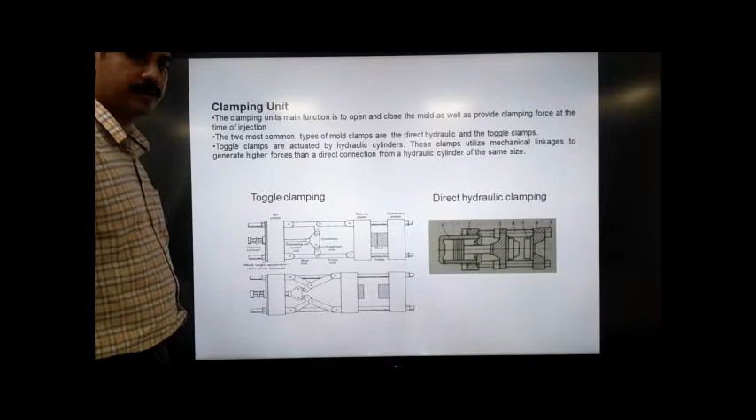So we are having the clamping unit. As we already mentioned, we are having different types of clamping units in different types of machines. In sophisticated modern injection molding machines, we are having different types of clamping units. Most commonly used is two types of clamping: one is toggle clamping, and the other is hydraulic clamping.

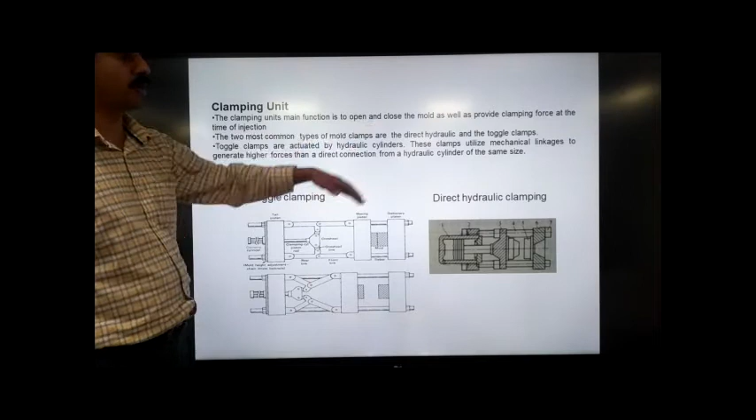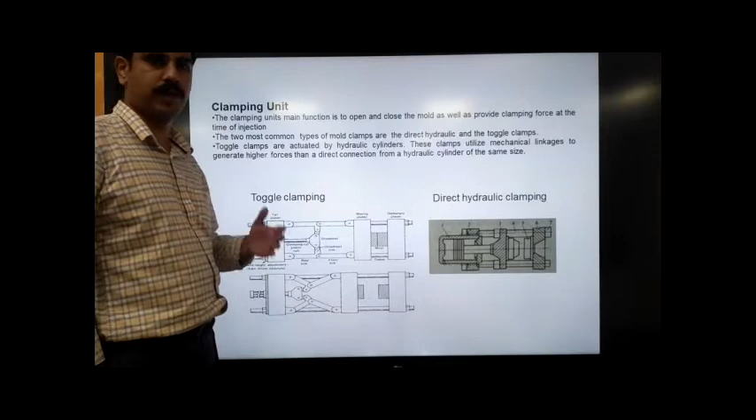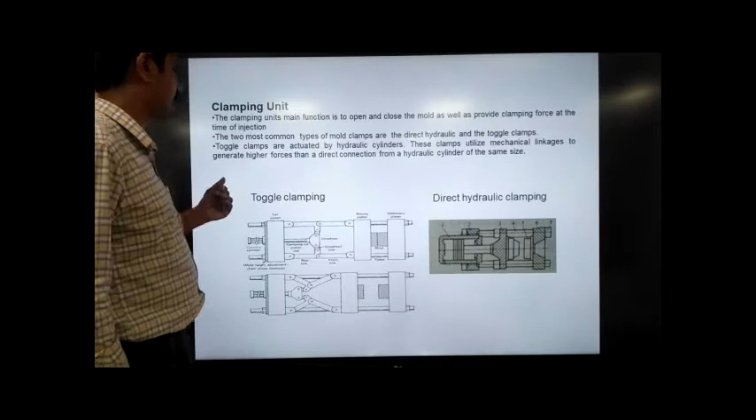So what is the function of this clamping unit? Of course, it is to open and close the mold. It is not simply opening and closing, it needs to provide the clamping force at the time of injection. So that is very important. Opening and closing is required, but more importantly, the necessary clamping force to keep the mold in the closed condition is provided by the clamping unit.

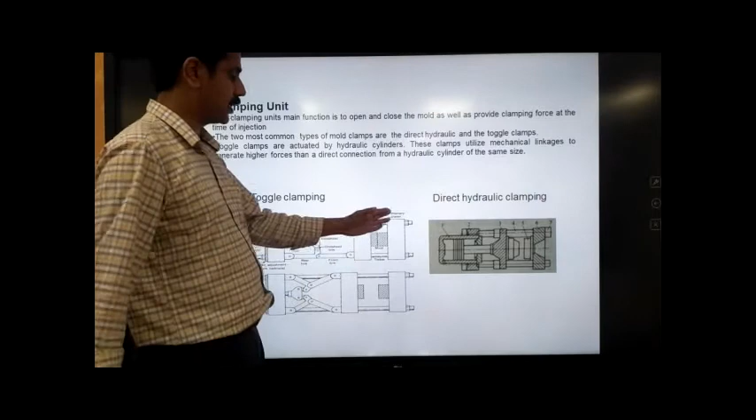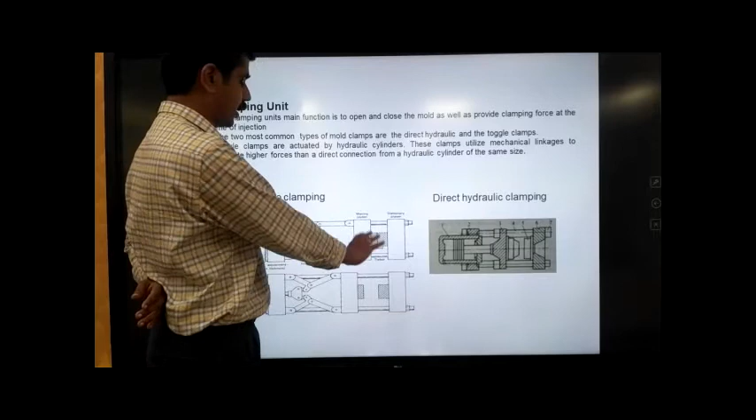And as I mentioned, we are having two types. Toggle clamping system, as we have already mentioned in this picture, you can see in the figure, I will explain. So here we can see the mold. This is very small as far as the other things are concerned, because we are more focusing on this. For understanding, we can say there is a stationary plate and a moving plate, and the mold is kept at the center. We require this plate to be opened and closed. So this is now in the closed condition, the mold is in the closed condition.

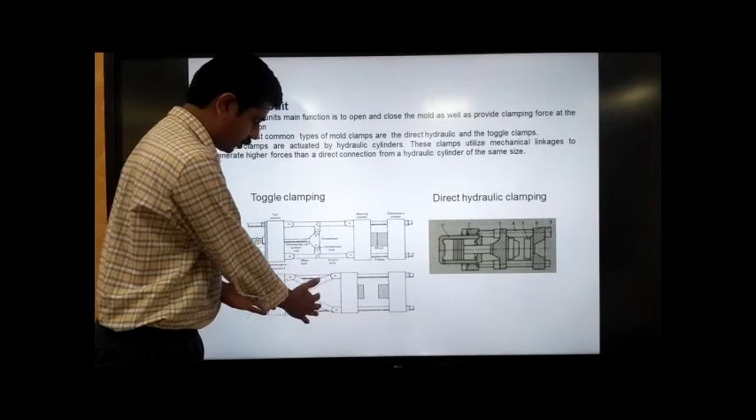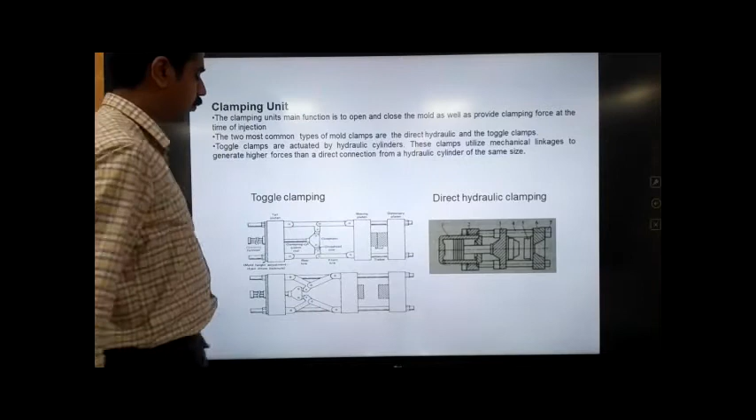So for this closed mold, we will have the connection using several crossed links. These crossed links will help in closing the mold, and we'll have the toggle clamping system in the collapsed condition and the opened condition here. Now the mold is open, so these crossed links are now collapsed. This will be stretched in this fashion. So simply we can say this is going to be a mechanical locking system that is used.

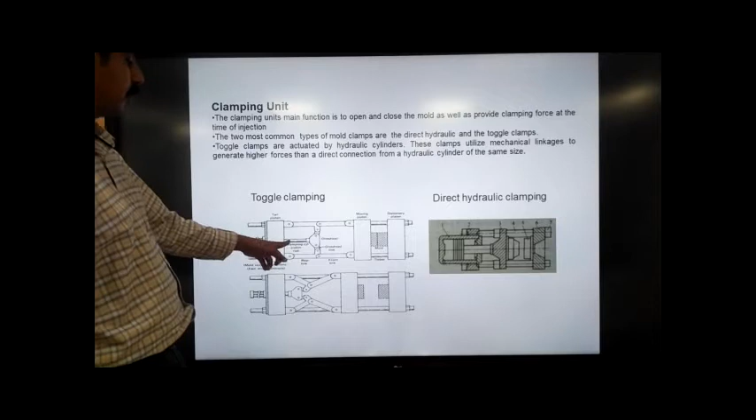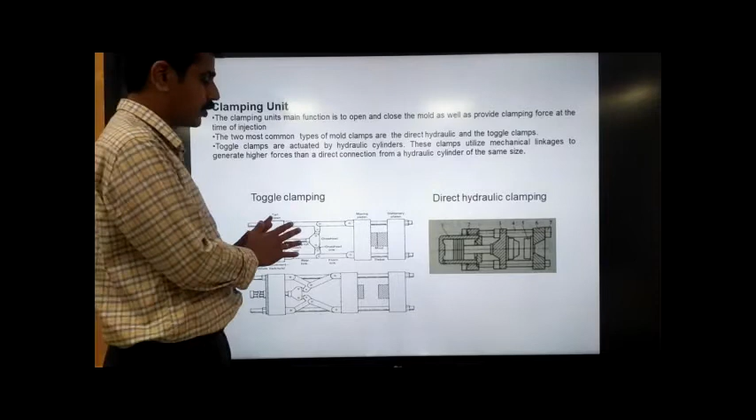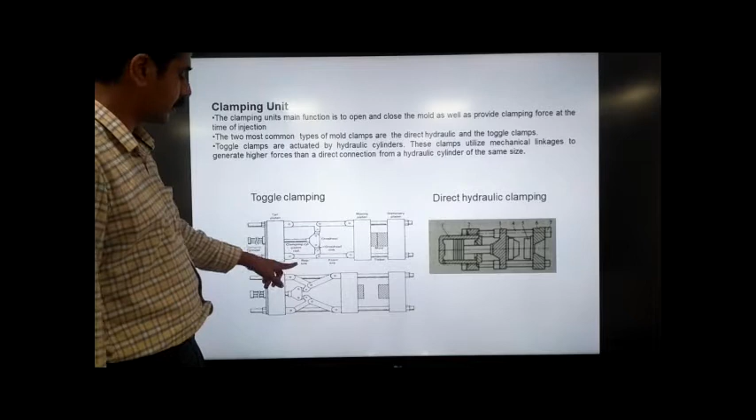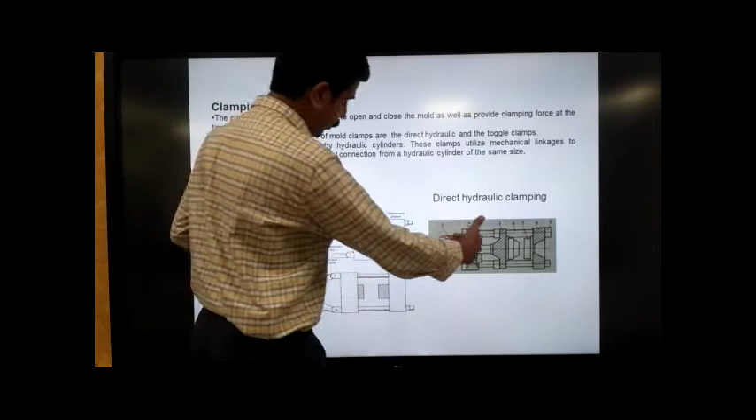This system is actuated by the help of a clamping cylinder piston that is being shown here. We are having a clamping cylinder piston used, and the actuation, that means the links are being stretched by the help of this hydraulic system that is being used. But the majority of the force required for keeping the mold in the closed condition is given by the links, that is mechanical links, or simply we can say we are having front link, rear links, etc. These links will provide the necessary amount of pressure required to keep the mold in the closed condition.

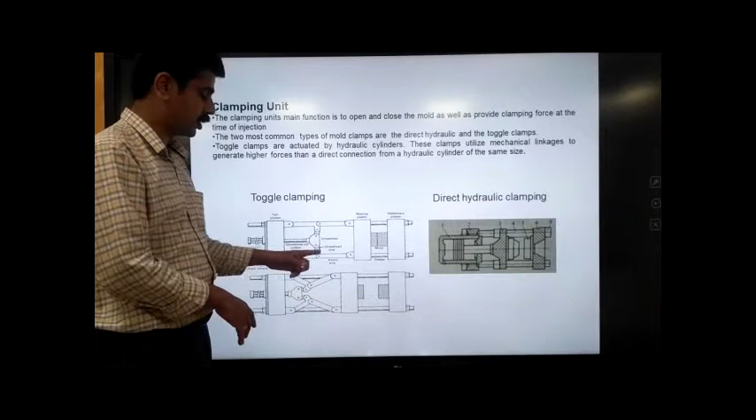Why do we require that pressure? Because from this side we are having very high injection pressure of plastic material that is entering into the mold. So the mold should not get split apart, and we need to keep it in the closed condition, and that force is exerted by using these stretch links.

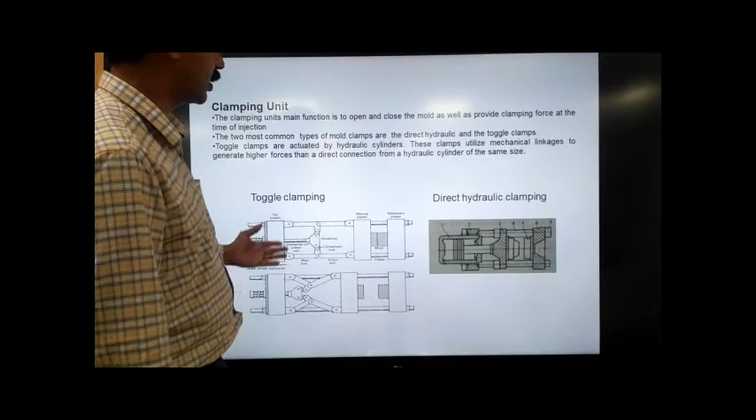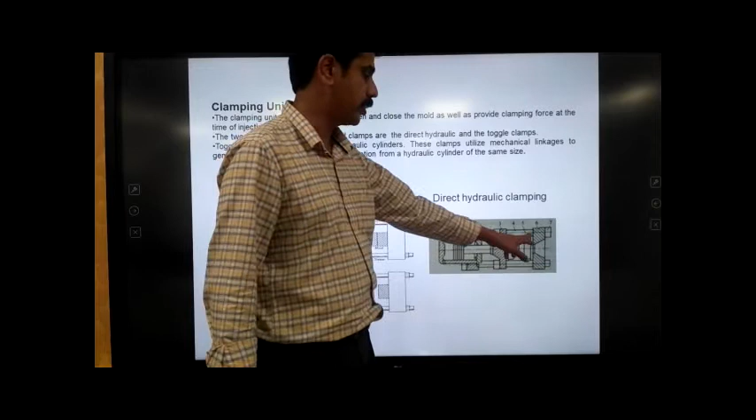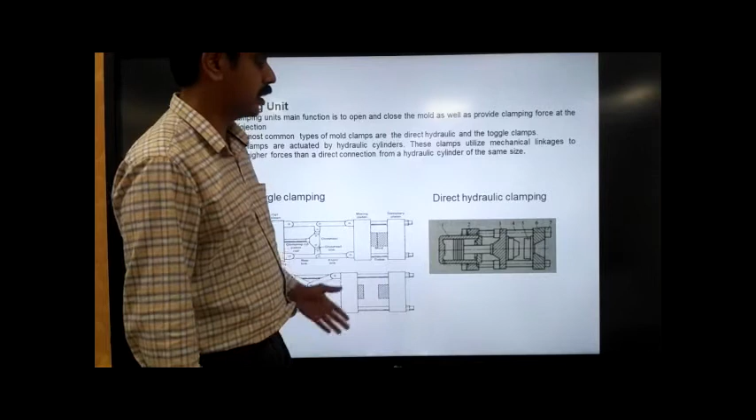And when we come to the hydraulic clamping system, we will not have this mechanical arrangement. The whole pressure is exerted with the help of pressurized oil. The oil is being pumped using a pump and a motor. It will be pumped, and the mold is being placed in between the stationary and moving platen, and the whole pressure required is given by the oil pumped by the hydraulic system. So we are having different arrangements for that.

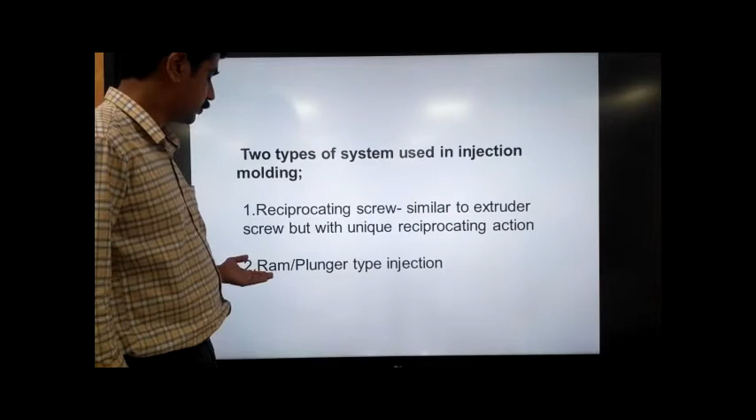We'll have detailed discussion later, and we'll discuss what is going to be the type of system used in injection molding. Normally, in the majority of cases, we will have a reciprocating screw machine. Nowadays in industry we will not be able to see the second type. This was actually used earlier in industry. Nowadays ram or plunger type injection molding machines are not commonly used.

And the functioning of the screw system is explained here. I will have a very short discussion on this. The resin is melted by mechanical shear. What is meant by mechanical shear is the shear force that is exerted by the rotation of the screw. We are all familiar with the shear force. When the screw rotates, there is a very small space in between the screw flight and the barrel.

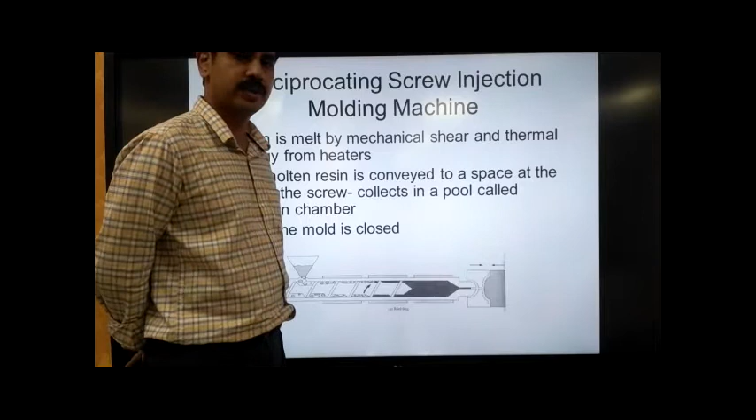So there is a very small clearance. Through this clearance, the plastic needs to move forward. That barrel is being heated thermally, that is why thermal energy is given to the barrel. So along with the thermal energy and the shear force, the plastic will get plasticized. The molten resin is conveyed and collected in this injection chamber. That is how the process will go on.

And then the material that is being accumulated in front of the screw is injected into the mold. Here you can see the mold is closed, and the plastic material is being conveyed. This picture is only intended to give knowledge of how the plastic moves forward.

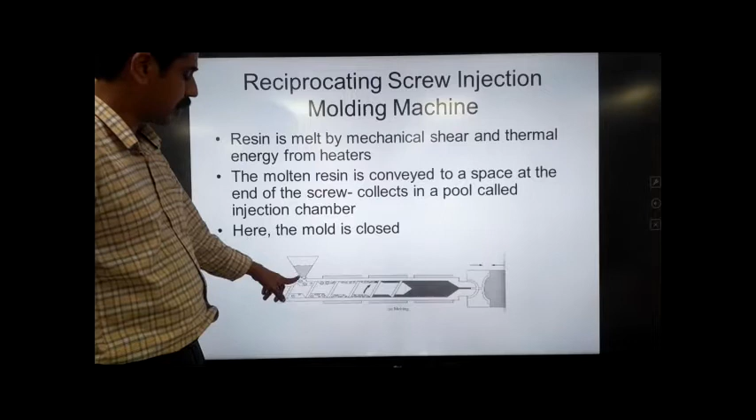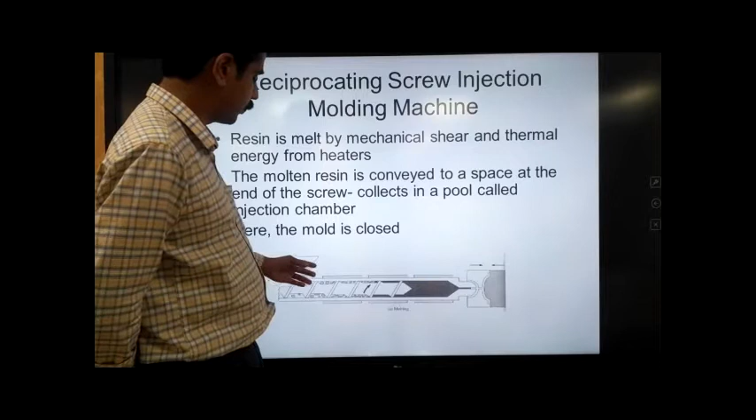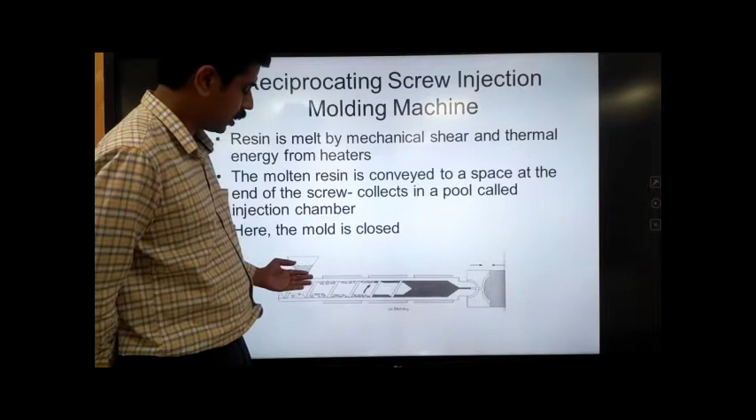You can see that here the plastic granules are of larger size. When it moves through the screw flight, the size is getting reduced. It is finally reduced, and now here it is being plasticized. As the plastic material moves, this barrel is being heated by the band heaters placed externally, and the plastic material in granules moves forward, gets the particle size reduced, then plasticized and gets accumulated in front of the screw. That is how the process will go on. This is simply the melting process, and the plastic is getting accumulated.

So now we'll have a discussion on the reciprocating screw machine and how it functions.

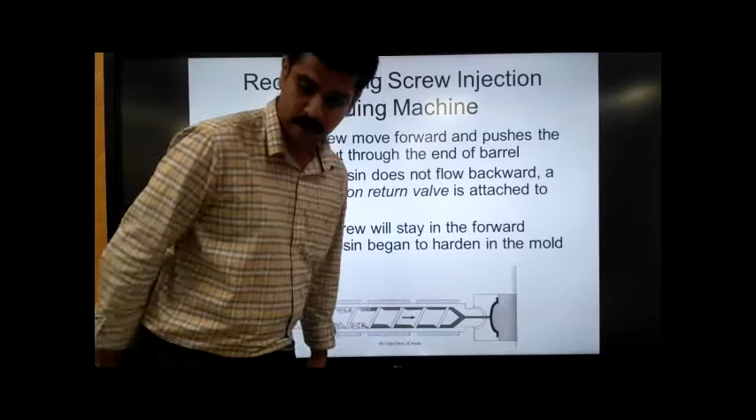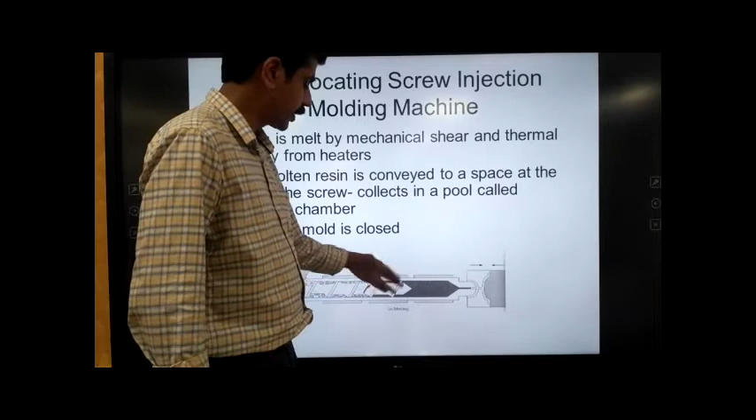Once the plastic material is added, the entire screw moving forward is used for injecting the plastic material. Once the plastic is melted, it injects the material. In the previous picture, you can see the screw is in this position. The screw position is backward, or it moves backward, and when it rotates, it moves backward. That is how the process goes on.

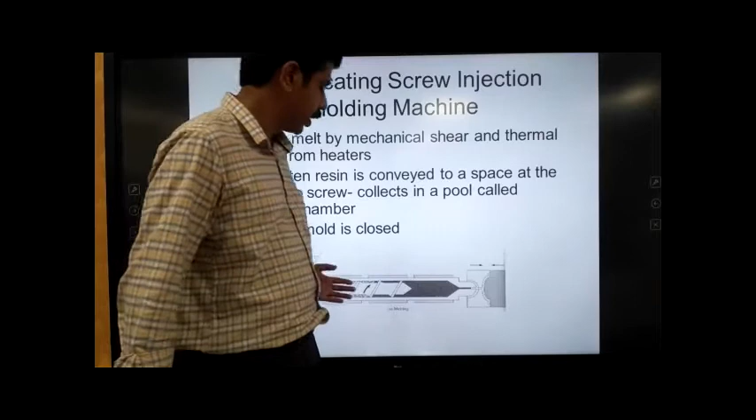Once the plasticized material is accumulated, it will have a reciprocating motion. Further, it will not have any rotation. It will have a very fast reciprocating forward motion. That is how the material is being transferred.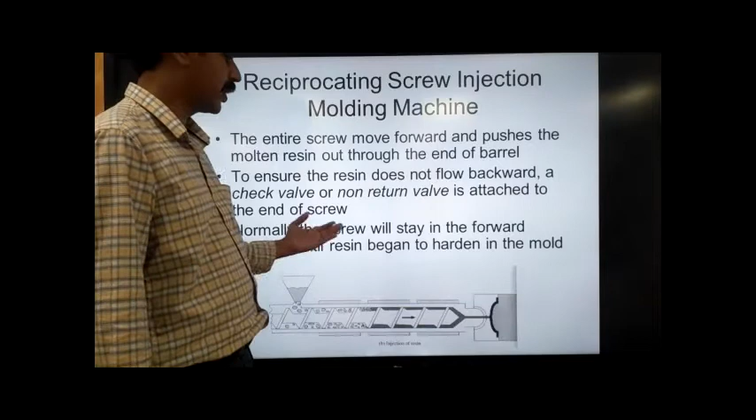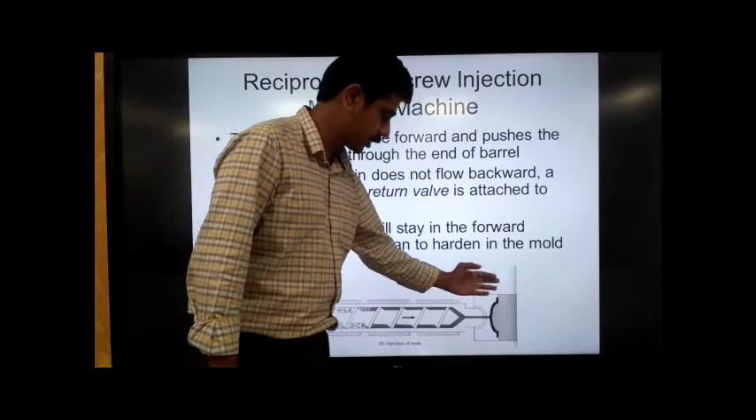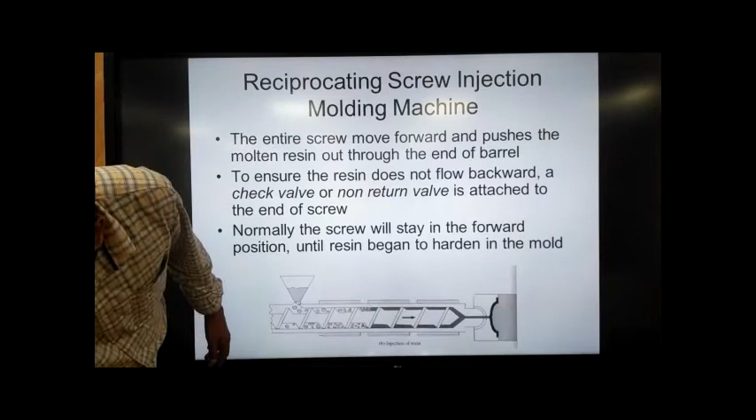Once the material is transferred, the screw will stay in the forward position for some period of time, simply until the resin begins to harden inside the mold. Once it moves forward, the plasticized material is transferred to the mold, and the screw remains there for some time so that the plastic that entered the impression remains there and gets solidified. For that particular time, the screw stays in the forward position, and then it starts to retract.

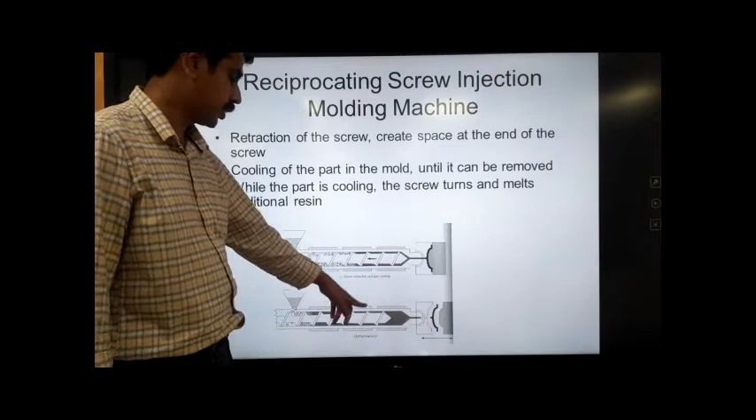When the screw retracts backward, again the plasticization occurs and the material accumulates in front of it. This is going to be a cyclic process. Once the material is added, this process continues for a number of cycles. So when we require, suppose, 10,000 products and we have a single impression mold, once we set the machine, it will continue its operation without any stoppage, but the process is cyclically continued.

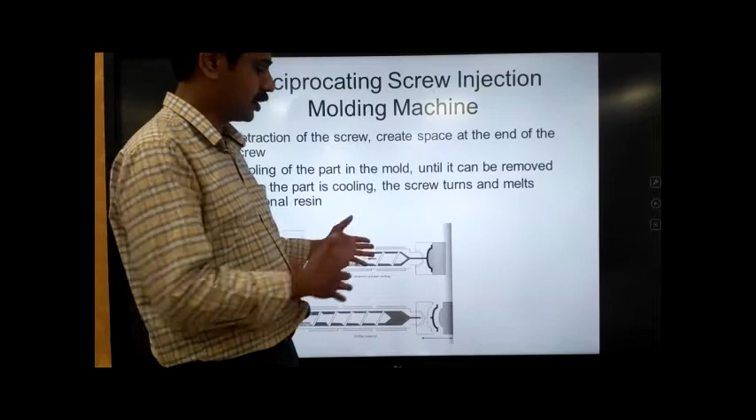So one material is added, the added material gets plasticized, gets accumulated, it is injected, again the screw rotates and moves backward. Like that, the operation has a cyclic effect, or cyclically the process goes on.

The advantage of this process is that screw plasticization gives uniform melting. One important thing regarding thermoplastic material in injection molding is that we require uniform melting of the plastic material. Otherwise, if the plastic is not uniformly melted, we'll have unmelted plastic material going into the impression, and the process will not be continuous.

Again, we'll have very good dispersion of additives, so mixing of the additives is very important. When we come to the injection molding process, normally we have 2-3 additives commonly used. The most commonly used one is color. In some cases, we will also have certain fillers.

Suppose we are going to have color. This color is used in a very small quantity, but the entire plastic material needs to get that particular color. So before that, we require good dispersion. When we use a reciprocating screw injection molding machine, we get very good dispersion.

Compared to other processes, we have lesser injection pressure. That means when using ram injection molding, we have greater resistance for the plastic to flow, and the pressure requirement is very high, and we'll have fewer stresses.

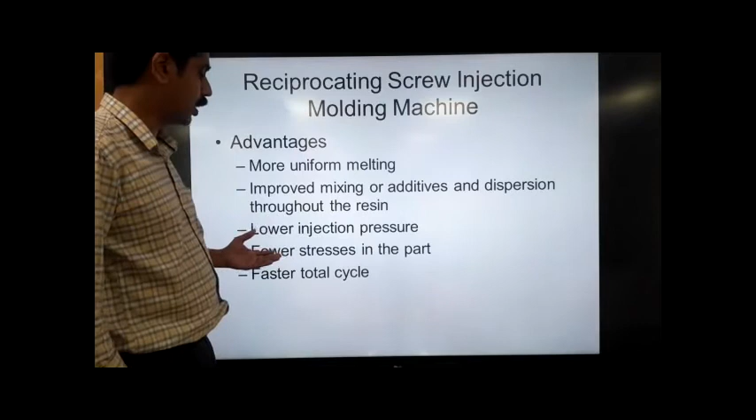It is the stress induced in the part that affects its performance. In an injection molded product, one of the main problems we face is regarding the internal stress that comes into the product. So we require the product to be made with lesser internal stress. Compared to ram injection molding, screw injection molding will have lesser stress induced into the part. And the last one, very important, is that we have a very fast total cycle.

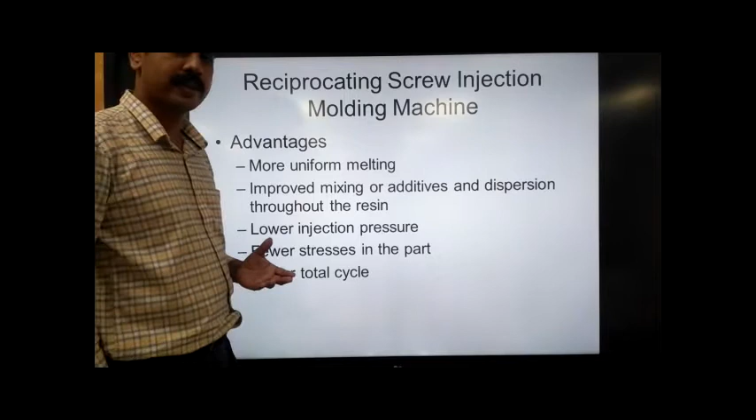That means the time required for the cycle to complete is very less when we have screw plasticization. In the injection molding process, normally in industry, we can save 1 second of time. When that is saved, we have plenty of money saved at the end of the day, because 1 second in one cycle is very important when it's running 24 hours.

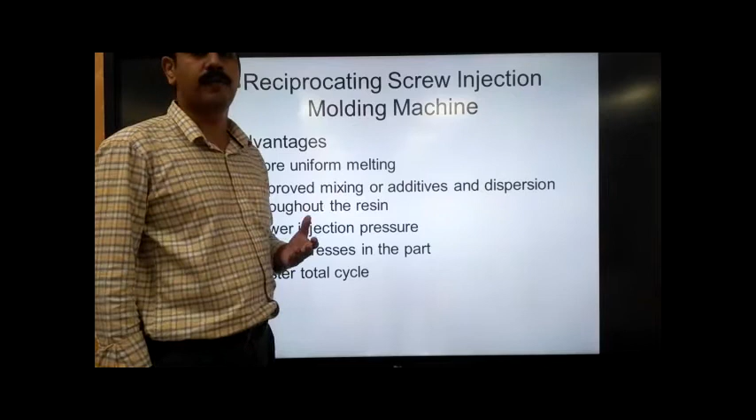Suppose the total injection molding cycle time in one process is 50 seconds. If we are able to save 5 seconds, we are going to have a huge improvement in the profit we achieve at the end of the day.

So this is the RAM injection molding machine. As I said, this is not commonly used nowadays, but for academic purposes, if we study this, here we have a RAM that is used for plasticizing the material, and for spreading we have a torpedo.

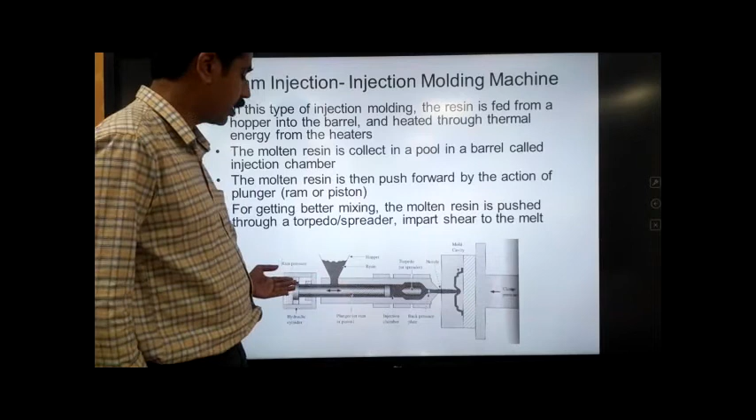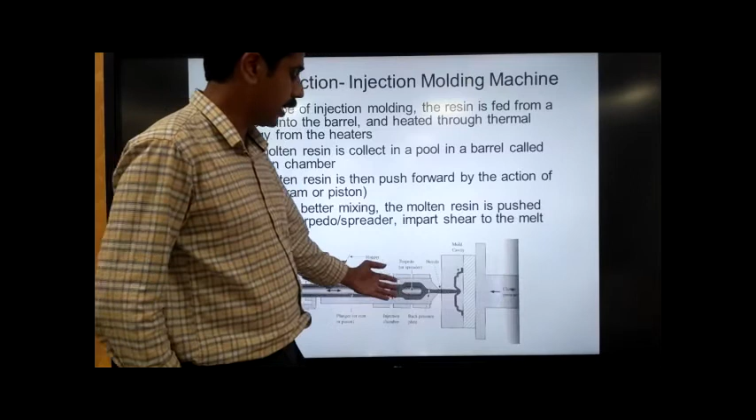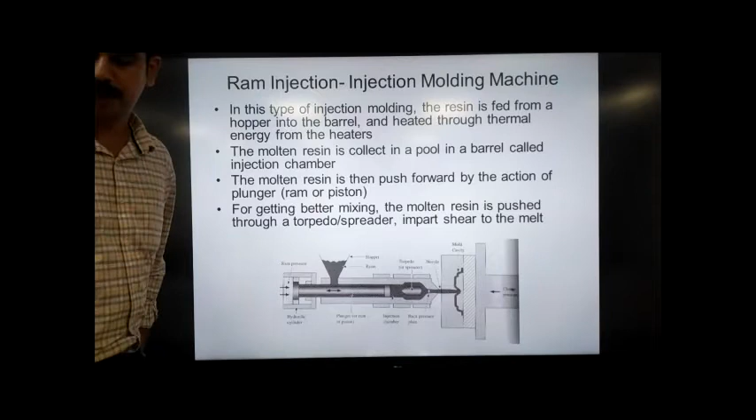So we have the same arrangement, but because we don't have any screw barrel assembly, we only have a RAM, and the plastic material is allowed to be injected. For that we have this RAM arrangement, with a torpedo for spreading the material, and the mold is fixed.

The core cavity arrangement is very similar to the other type of machine, but this type of machine is nowadays not industrially important. Coming to the materials used in injection molding, we'll have almost all the thermoplastic materials which can be injection molded.

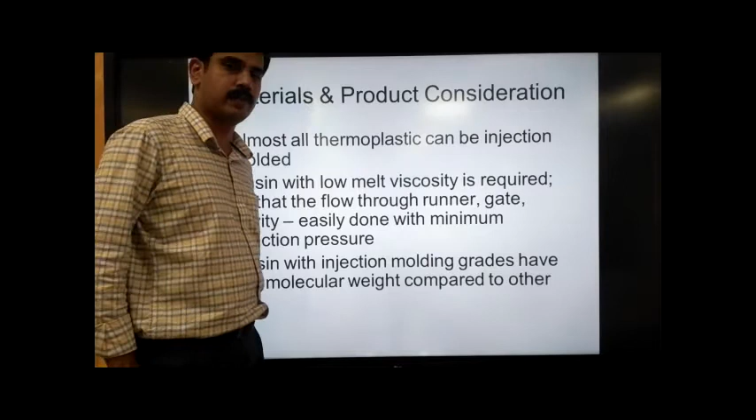This is one of the beauties of the system. If we are having one injection molding machine, we can have almost all types of thermoplastic materials processed. So suppose we require different varieties of products from different types of materials, one single machine is enough for all the thermoplastic materials to be processed.

And we require the resin to have low melt viscosity. That is another important requirement as far as the material is concerned. Melt viscosity in injection molding must be less. Why? Because if the material has high melt viscosity, the process will not be very smooth.

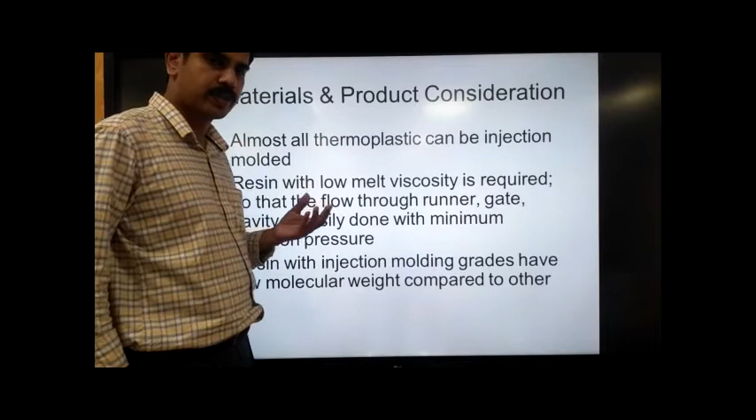Melt viscosity must be less so that the material flows through the runner, gate and cavity with a minimum injection pressure. So the injection pressure should be less. Why should it be less? To reduce the internal stress. So the material, if it has high melt viscosity, will also have more internal stress.

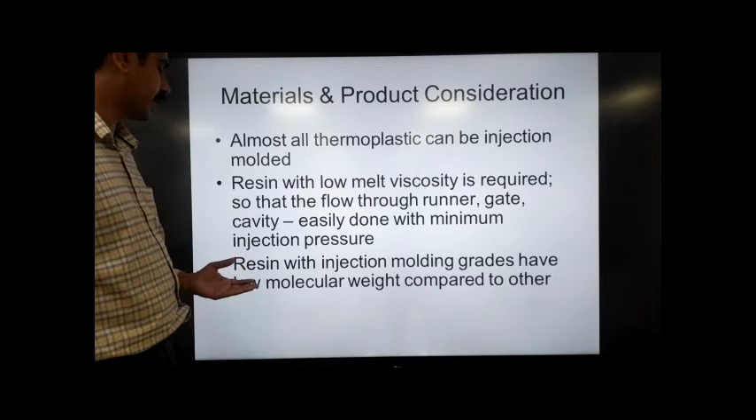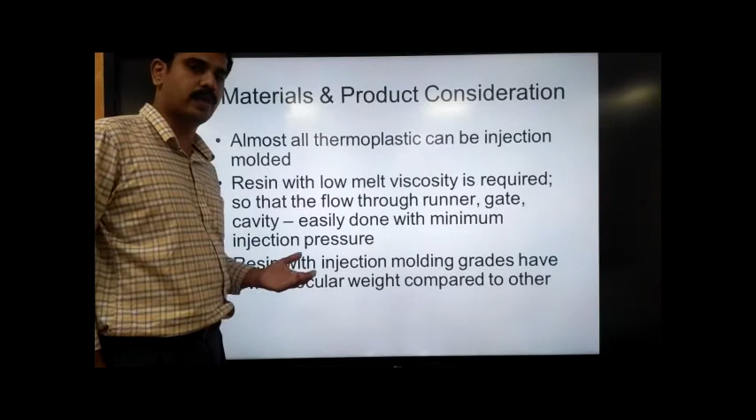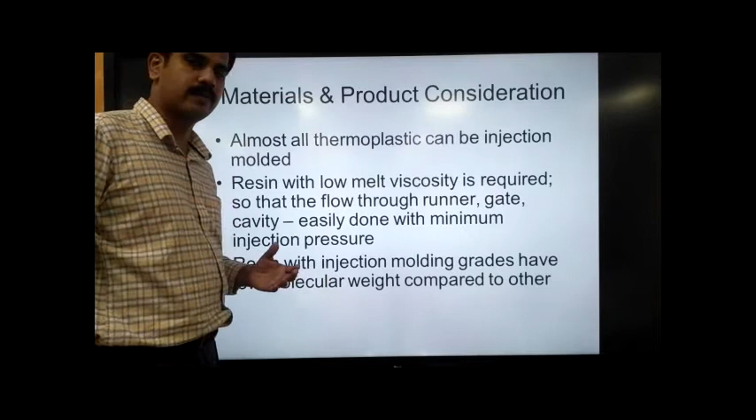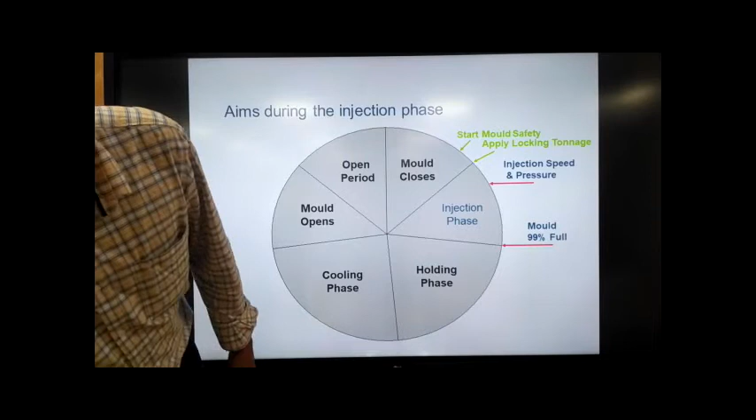So the resin normally used in injection molding will have different grades of low molecular weight compared to other processes. That means when we compare it with extrusion, the grade of material used in injection molding is different. Normally we classify this grade based on the melt flow index value. As the melt flow index value is higher, the melt viscosity is less. So materials having high melt flow index are normally used for the injection molding process.

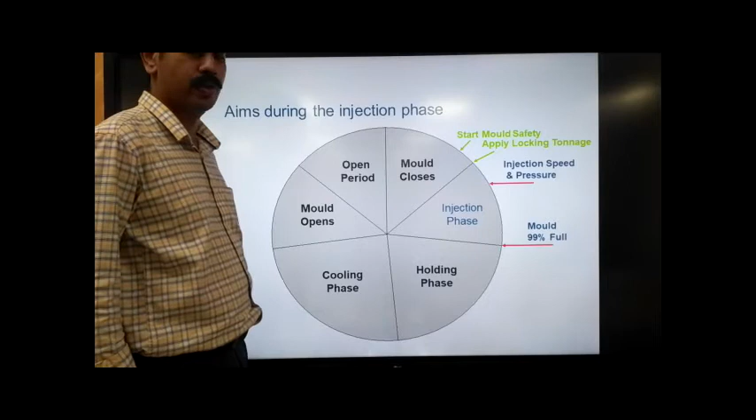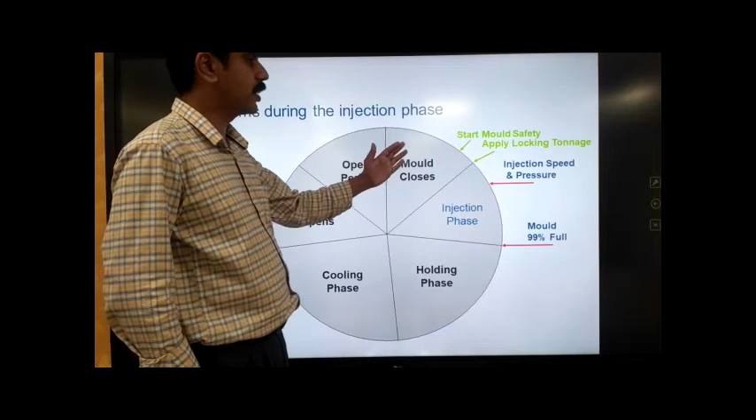With this particular slide, we will conclude this session. This shows a pie diagram of what all things happen during the injection molding cycle. This cycle continues in the injection phase. We start with the mold closing.

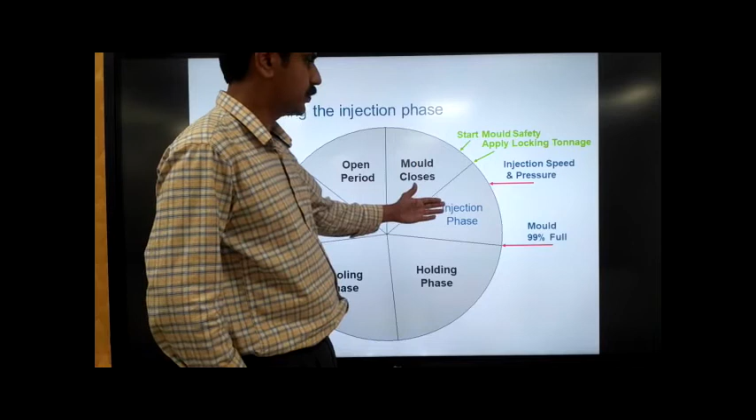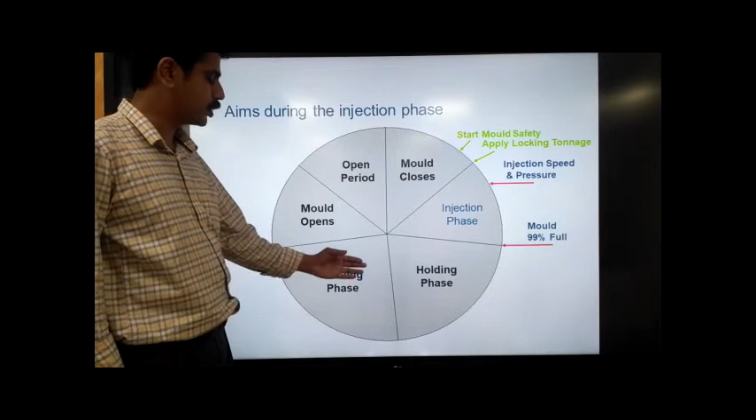After the holding phase, we have the cooling phase. The cooling phase means the material is completely cooled to a temperature near room temperature, say precisely 45 to 50 degrees Celsius, because further cooling would take more time, and more time would have adverse effects on the cycle time. So we require a temperature where the plastic is solidified to a level where we can remove the material without any distortion.

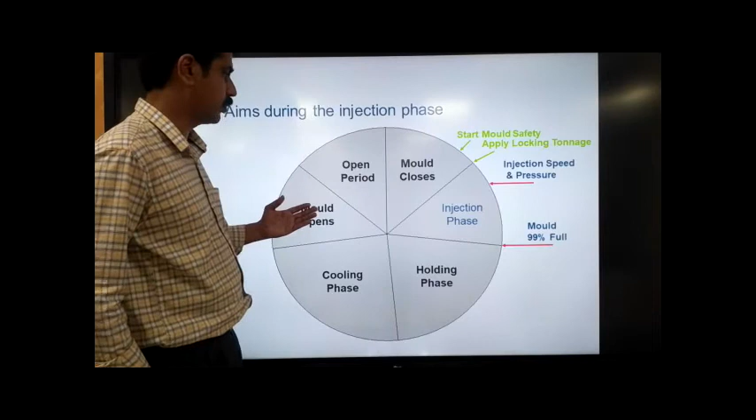After that, we open the mold. Once it is opened, it takes a further period of time for the material to be ejected. So the open period means that the plastic formed inside can have proper ejection done.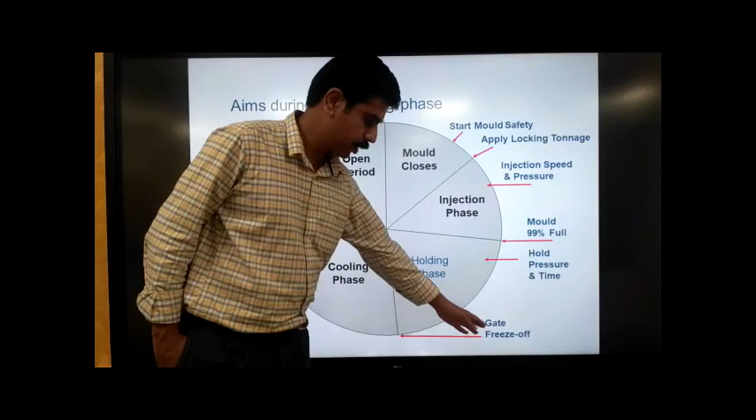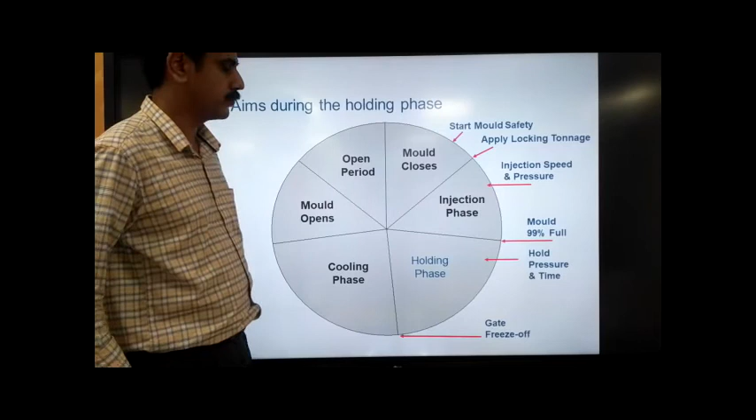So that is simply how the injection molding process proceeds. There are some more technical things used in the holding phase: gate freeze-off, and mold safety associated with the mold processing. Mold safety is associated with the mold being properly closed and opened. We need very specific care in mold opening and closing, and the whole operation continues like this in the injection molding process.

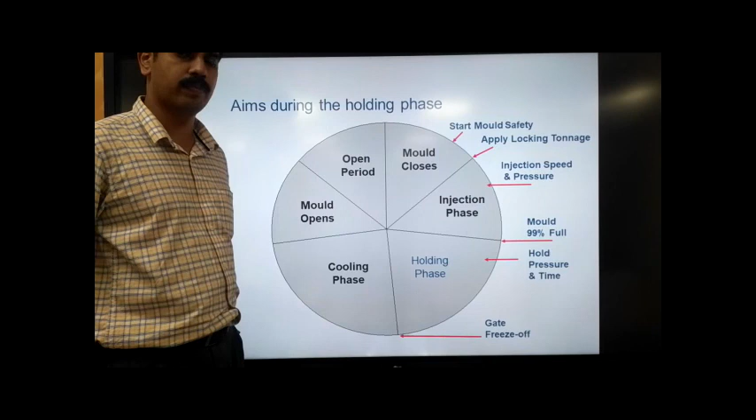So with that, we are coming to the conclusion of this particular module of injection molding. We will have a detailed discussion about the molding process, as well as the parts associated with injection molding processes, in the next class. Thank you.